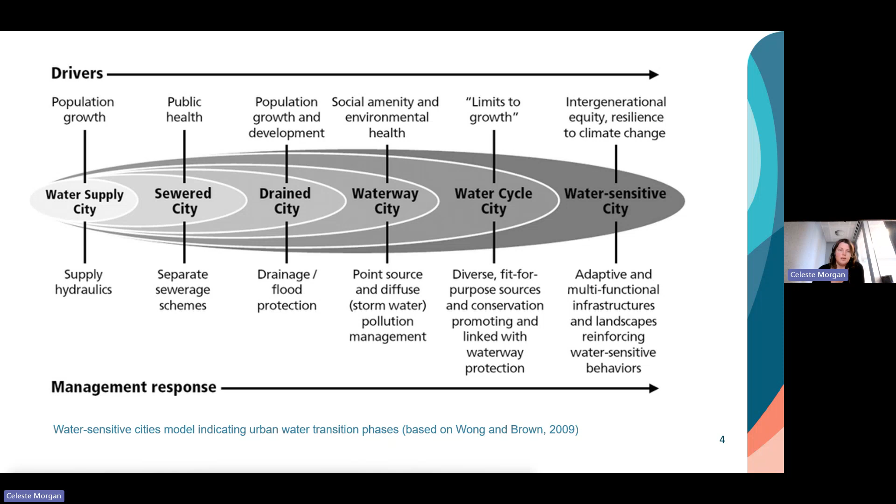Thinking about Victoria in particular, there have been key turning points in its journey over time. Waterway pollution was a key driver in the 80s and 90s, leading to best practice guidance and targets for nitrogen, phosphorus, and suspended solids pollutant removal in stormwater management. But in the 2000s, when drought struck, we started thinking about how we could capture water resources from urban areas, like recycled wastewater and stormwater, as a new water supply.

We've evolved through the 2010s to think about how we could support livability outcomes, since our cities and towns are getting hotter, so how can we support greening and cooling? At present, we're in a phase thinking about how to make this more sophisticated, how to change our governance structures and think more at a catchment-wide scale about integrated water management.

So how do we summarize integrated water management as a term? It's important to recognize it is a verb, a doing word, about a process, not a thing. So it's important to distinguish—you don't point at initiatives and say that is the IWM. IWM is the process that gets you there.

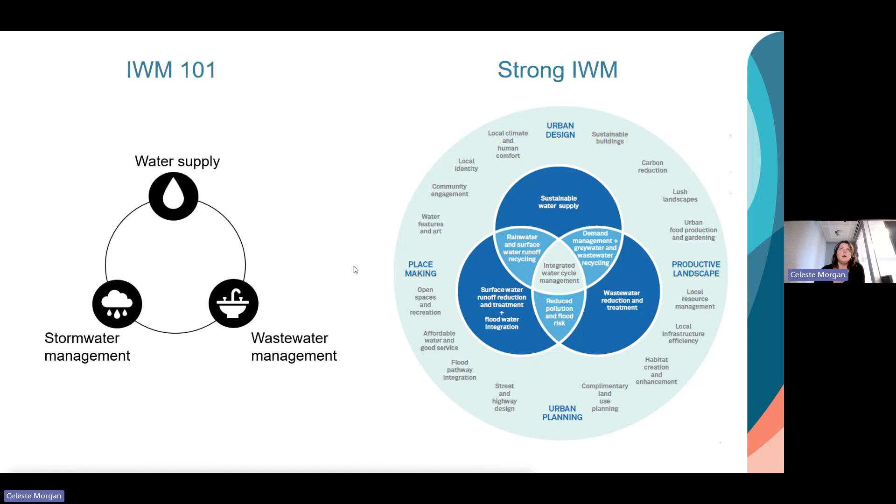So when we bring that together, what does it look like? As I said, IWM is a process, but the outcomes can be quite different in different places and really respond to the context that's needed. We could be creating opportunities for greener places, for soaking more water into the ground and keeping it in the landscape. We could be supporting healthier environments, whether that's waterways, coastlines, or bays, securing our water supplies by providing new opportunities to capture, treat, and reuse water locally, whether that's rainwater, stormwater, or wastewater, creating cooler and more resilient environments, and effectively supporting livability. There's many different initiatives in that portfolio that can come to bear.

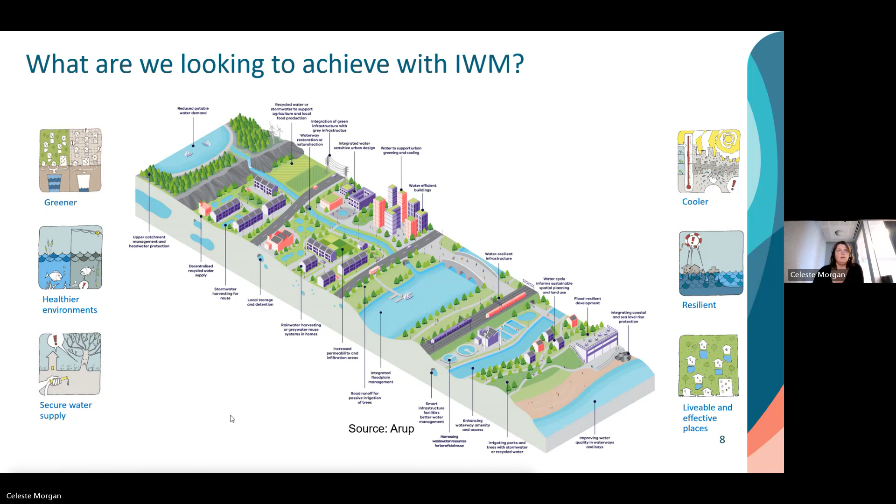So what does IWM planning look like? Many of you may have come across an IWM plan or strategy, and that can be done at different scales. It might be for a development, a council, or a growth area. Generally, these go through a fairly similar process to develop them.

It is understanding the place-based strategic drivers, bringing together that evidence base. You might hear us talk about a water balance - that's really just building the whole water cycle profile for a place and understanding how that will change over time. So as we develop more, will we have more wastewater, more stormwater? What will the demands look like, and where are they? Are they within buildings, or within open spaces? So that's why we build that picture.

And then we define those place-based outcomes and objectives for IWM, analyze the options that could make a difference, prioritize those, and then develop the plan and incorporate that into the proposal going forward and various implementation mechanisms, which I'll talk a little bit more about shortly.

That's IWM in a nutshell. Hopefully we're all on the same page as to what we're talking about today and that process of integrated water management.

But I want to reflect on how far we've got with IWM in Victoria. It's worth noting that Victoria is very much a leader on the global stage in this area and has made great strides forward over recent years. So in terms of the main things that have been happening and the key progress we've made in Victoria, I would say those are threefold.

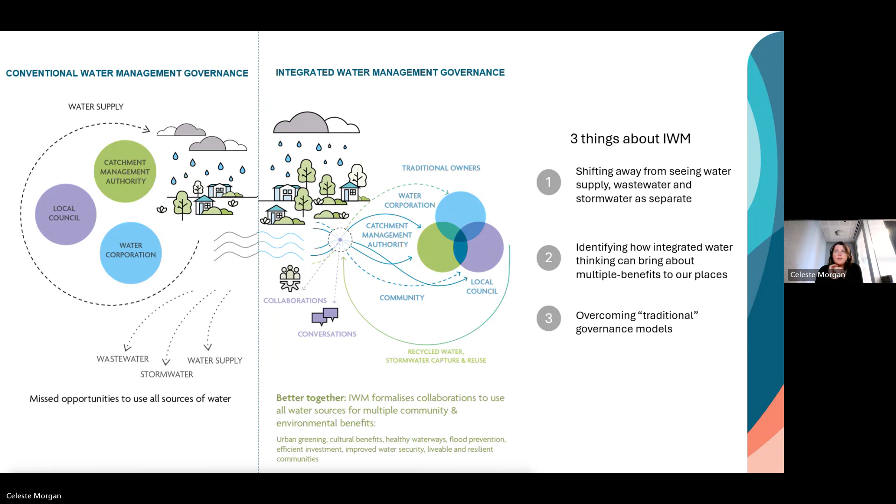So many of you would have heard of the IWM Forums, which have been set up across the Melbourne region. There's 5 forums which are based on the major 5 catchments. They're also set up within regional Victoria, usually according to the main water authority boundaries.

The focus of those IWM forums is to get that executive level commitment to IWM and to define those shared outcomes for the forum area and to provide that authorizing environment to make shared decisions. The embedded policy that supports that was developed as part of the Integrated Water Management Framework in 2017, and that enabled the forums to be created. Now the forums have been active for many years, most of them since 2018, and some of those have gone on to set targets and develop catchment scale plans, which I'll talk a little bit about, and now are in the process of really embedding those targets and setting actions for stakeholders to deliver.

The benefit, at least of having that broader view, is that it's naturally collaborative to think at a catchment scale, to think across a region and break down those organizational boundaries. So these forums are kind of set on an equal footing, so every stakeholder has a seat at the table, and we can really enable that coordination of the whole water cycle and paint a picture of those shared benefits that we want to drive. So that has been the impetus for developing strategic direction statements for each IWM forum, and now the plans and the actions that underpin those.

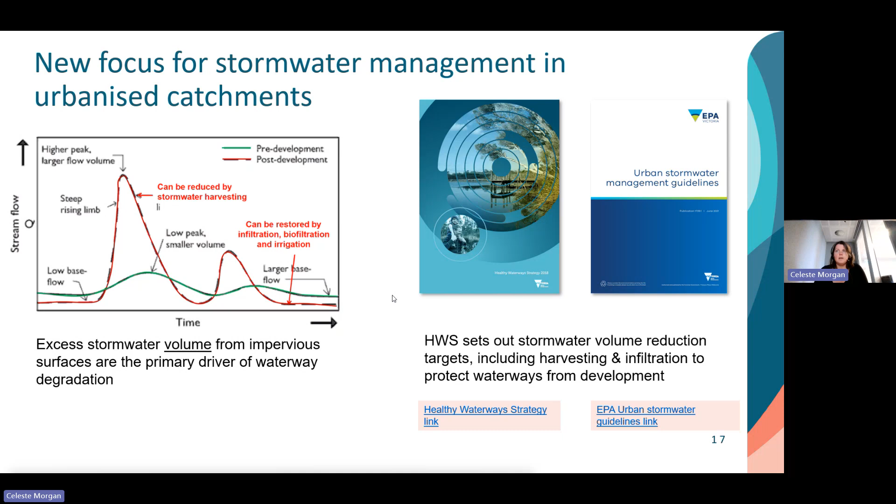Some of the details that some of you will be familiar with there is that there are targets that are available, and you'll see throughout these slides, which we can distribute. There are links to different documents which outline some of these targets, and they are divided into two areas. There are priority areas where we're asking for that removal of runoff and that harvesting to be quite advanced to really protect those priority waterways, which are defined by the Catchment Management Authority, and other areas which provide a baseline level of performance within more urbanized areas where waterways have already been impacted, but where we want to provide that ongoing improvement and help with other benefits such as flood resilience.

And how do we do this? How do we harvest stormwater and infiltrate it?

To get to the priority targets we've outlined here, where you're getting up to around 80% removal of runoff, it does take initiatives at every scale. It's important to think about opportunities to remove stormwater runoff at both the allotment and street scale, whether through rainwater harvesting or water-sensitive urban design initiatives, plus capturing runoff at a precinct scale for open space irrigation, or larger initiatives, and then also at a regional scale. Some proposals to scoop up runoff at a larger scale and reuse it are being considered across Victoria, so we can make a real impact on waterway health, but also drive water security benefits. That's a key policy progression very much front of mind in the industry at the moment.

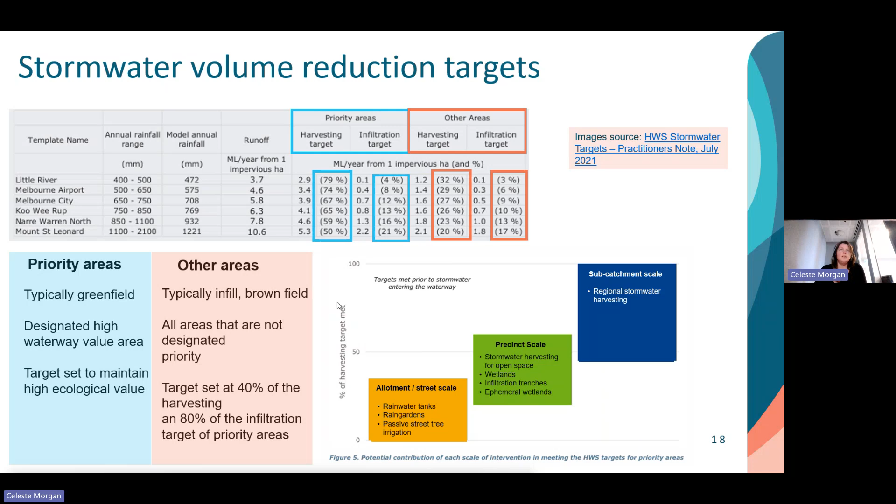How is it applied? This is a moving context, but at the moment it's applied under the Environment Protection Act, under the General Environmental Duty, which obliges all organisations to demonstrate that they have taken all reasonably practicable approaches to minimise harm. There's a bit of a grey area as to how that's enforced, but it does provide the legitimate expectation that all organisations, including developers and councils, show that they are doing everything reasonably practicable to reduce stormwater volume.

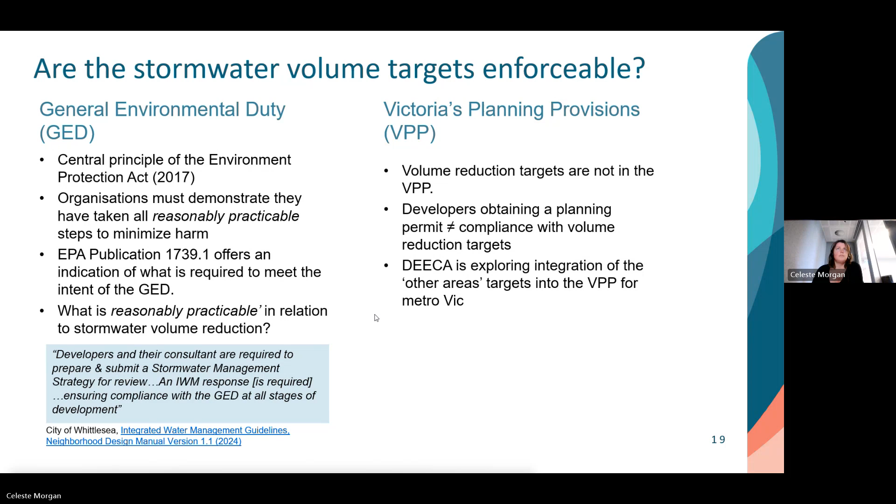The next aspect I wanted to chat through is how Victoria has been going in reimagining cities and water, and some key examples of that. How far have we got? A few stats for you: we have managed to reuse a total of 9% of our total stormwater and wastewater coming off the Melbourne region. These stats are for the Melbourne region, where we've been monitoring data so far, which has been no mean feat.

So a lot of stormwater harvesting and recycled water reuse is going on to get to that. We're supporting large amounts of active and passive open space with alternative sources. And in the Melbourne region, we have significant quantities of green-blue infrastructure in wetlands, waterway improvements, and rain gardens that have been introduced largely over the last 10 to 15 years.

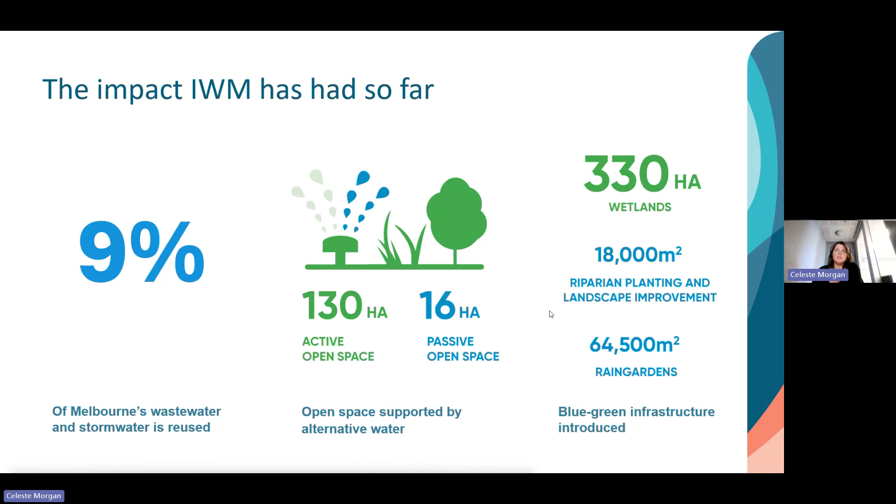I mentioned it's a place-based response, and I think it's worth thinking about opportunities for integrated water management based on: can we make impact with local decentralized water systems, or introduce a regional scheme, being the horizontal axis there? Are we constrained by urban design, or can we explore new concepts for urban design? There are different possibilities that lean into each of those. Some examples I'll chat through briefly.

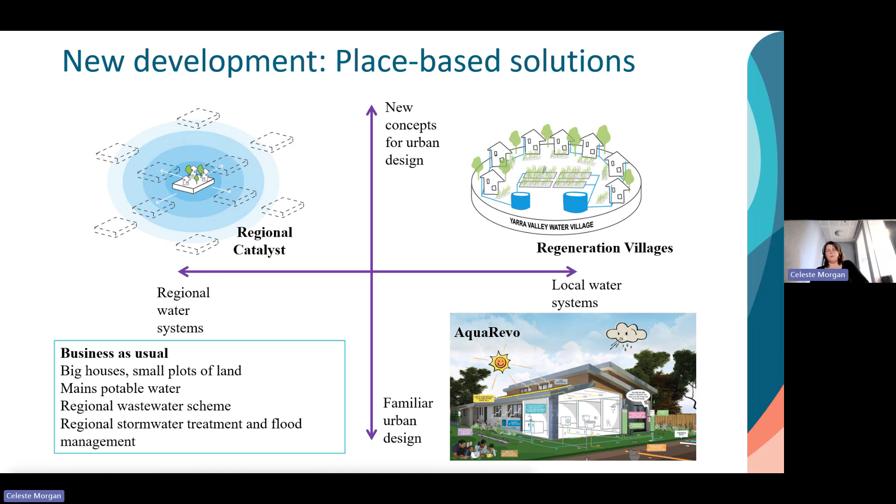AquaRevo, you may have heard of, looks like a normal development, but in terms of the tech and what's going on inside the houses and the community education, it is very advanced. They have smart tanks, which are monitored, which collect rainwater and then release it ahead of a storm coming so that they can refill. They've also trialled using rainwater for hot water supply, which is a new demand that can be accessed within the home. They also have a recycled water plant in use on site, which provides two non-potable uses: toilet flushing and garden irrigation. That's a great example which is on the ground.

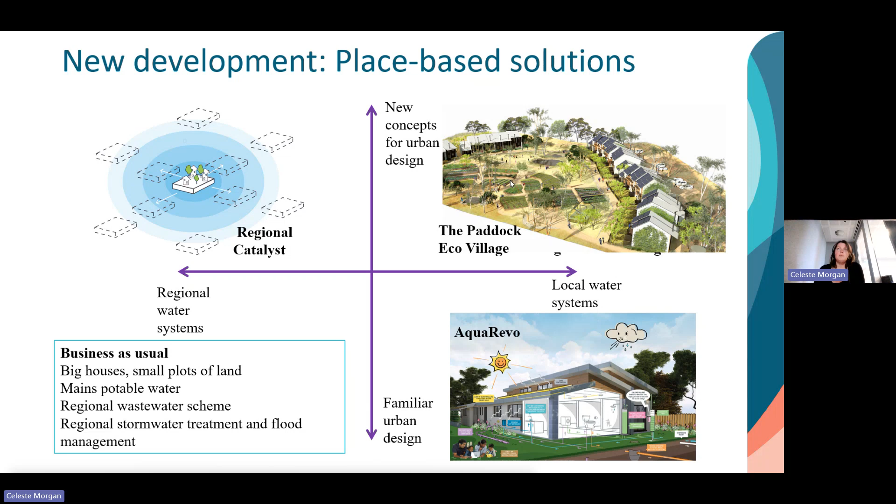In terms of new concepts for urban design, this is a development in Castlemaine called the Paddock, which has really experimented with communal growth gardens and use of water. It has communal rainwater tanks, and is really questioning how communities interact with water, but also with themselves, establishing that new way of life and new urban design principles.

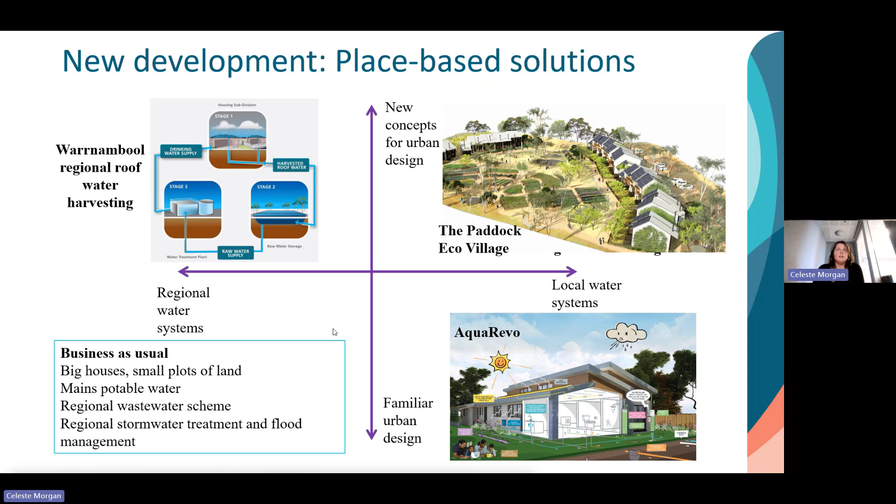For regional examples, there's a great one in Warrnambool, which we can link you to as well, which harvests from roofs and new development, takes that water, creates a new dual drainage system from rooftops, and takes that to a local reservoir to then be integrated with the city's water supply. So lots of different opportunities depending on the scale of influence and whether you're involved in the development design.

Those regional catalysts, as I mentioned, that changing stormwater harvesting drivers is providing us with more opportunities to think about what happens at the larger scale. Many developments build wetlands anyway to meet water quality targets. So can we be harvesting from those wetlands, and can we do that in a network arrangement to take them to a new source of demand nearby, whether that's a reservoir or for local reuse?

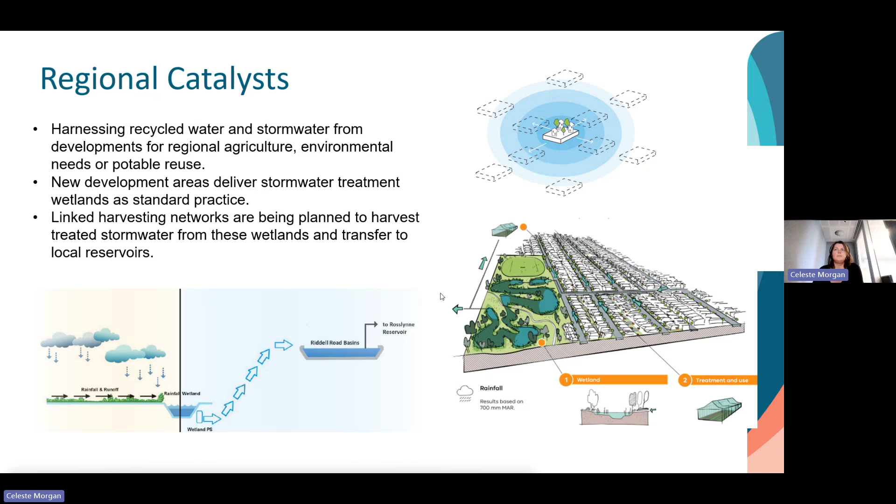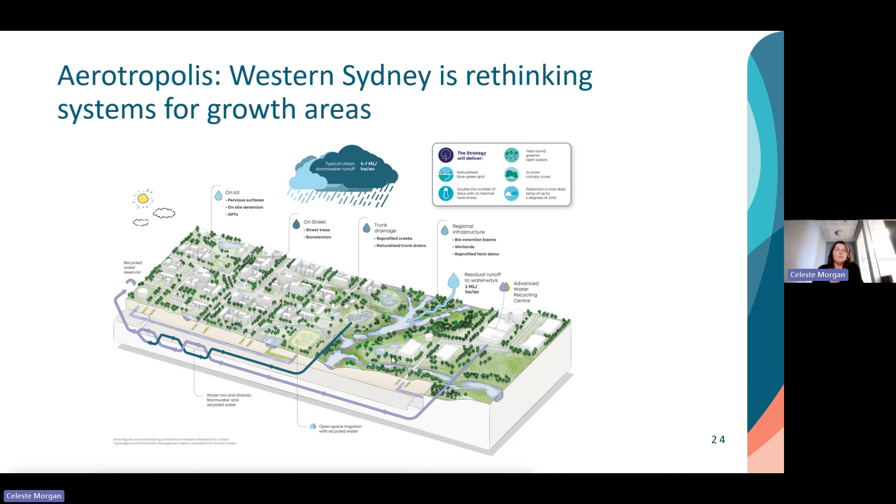We're not the only ones thinking about this. Outside of Victoria, some of you may have heard of Aerotropolis, an area of Western Sydney where they are thinking about effectively the same kind of solutions. Can we combine stormwater harvesting, blend that with local recycled water use, and supply that back to development? They're also thinking about how to embed better requirements for cooling and greening in the planning requirements so that there is an uplifted demand for irrigation to help reuse all of those water sources.

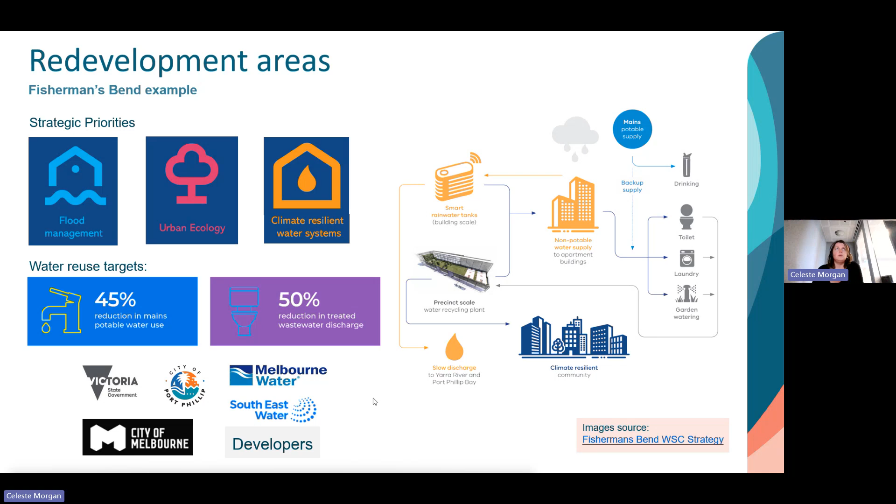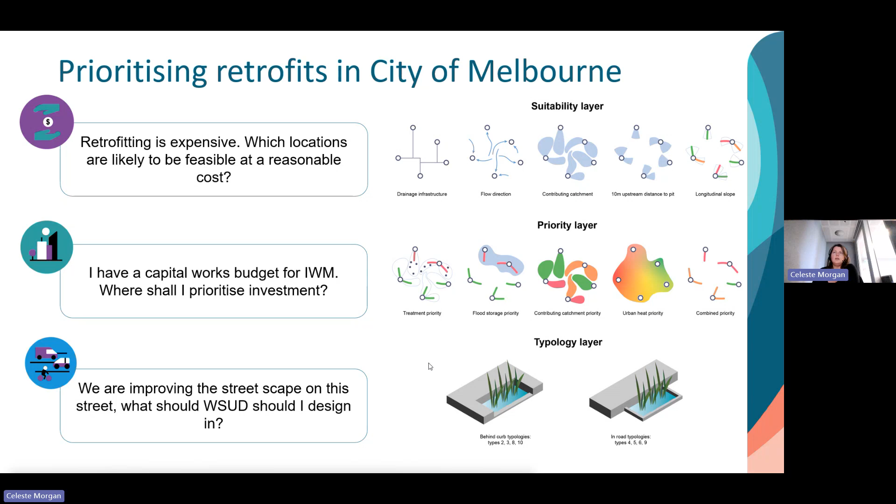I'll touch quickly on retrofits, which is another important aspect. It's not just about new development. This example is how City of Melbourne have been rethinking their city and looking at priority areas for retrofitting integrated water management initiatives within streetscapes. Here they embedded a spatial tool within council to at least do a first pass of feasibility and suitability for initiatives, and then look at prioritizing those and some suggested typologies.

What does that look like? Well, it looks like understanding how rainfall is falling on the city, how it naturally drains in streetscapes and where it effectively disappears underground into catch pits, and how we could intercept ahead of those. So that gives us an idea of where within the streetscape it makes most sense to introduce things like permeable paving, rain gardens, or passively irrigated street trees.

And to do that as well with the benefit lens in mind. So where is the most potential from a treatment perspective, from a flood storage priority? Where can we get the biggest bang for buck in terms of intercepting the most stormwater, and where are the urban heat priority areas in terms of the vulnerability of the population?

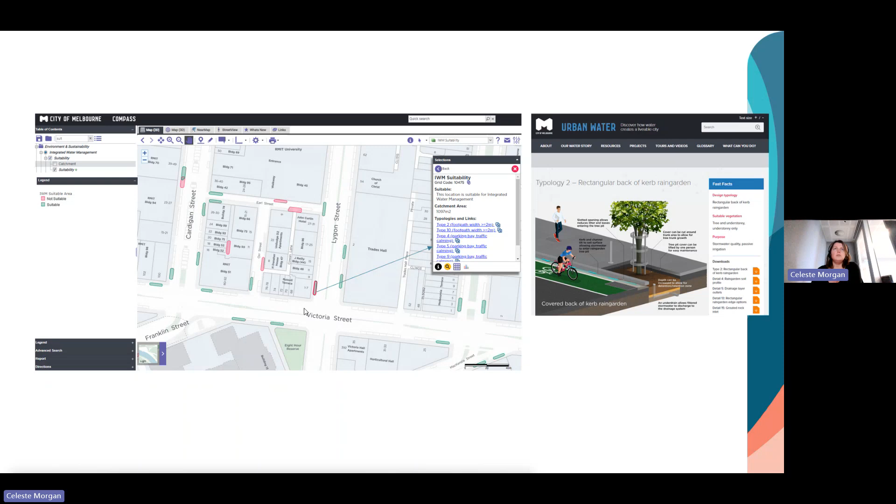That is now a kind of embedded system for council where they can see these windows of opportunity, and it links them to possible design typologies within their own system, which they can then apply. So any part of council can see that and use it as a first pass for potential solutions.

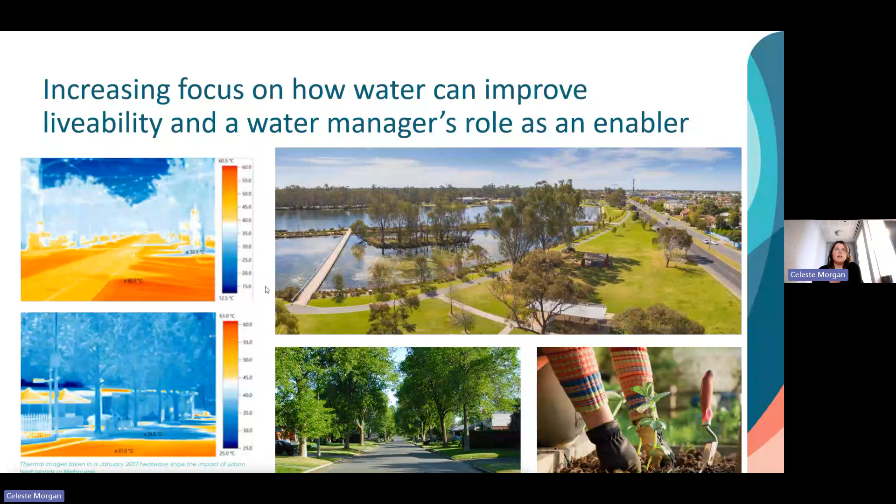The last bit I'll touch on quickly before we go to a short question break is just redefining value. That's been a key part of the journey in Victoria. Part of that is a rethinking of the role of water utilities and water corporations to not just be service providers, but to be purveyors of livability. How can we be responding to communities' needs for water by becoming an active participant in enabling IWM? Often that involves an organisation acting beyond their sphere of control, beyond their responsibilities which are written, and merging into their sphere of influence, working with other stakeholders, and the sphere of context.

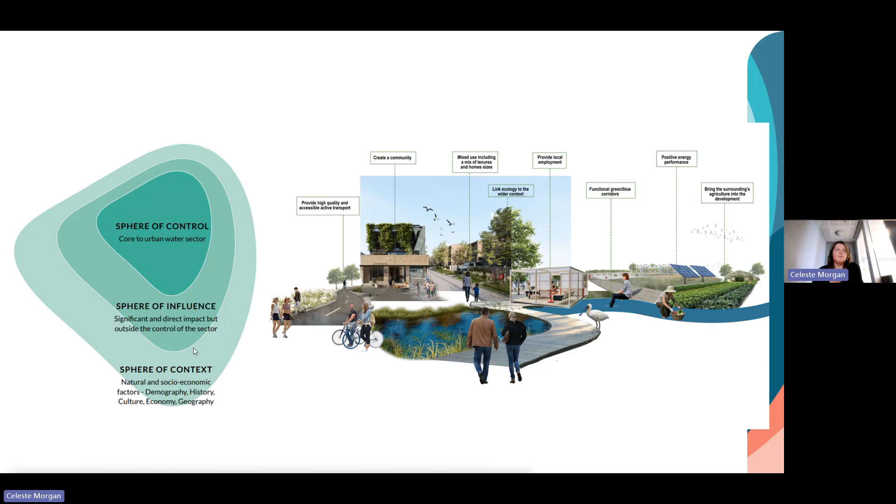To do this in the round, there's been a lot of work done on how we can value benefits better. So valuing the amenity benefits of community engagement, of greening, and bringing those into the conversation, as well as the standard benefits around the cost of water and water reuse, and then also getting an understanding of who's receiving those benefits as part of the business case, whether that be councils or stakeholders directly, or whether it's going to, say, park users or the broader community as a whole, benefiting from things like waterway health. There are a lot of resources which we've linked you to in this presentation if you're interested in that.

Another aspect which is becoming more commonplace in IWM is thinking about the forward plan. So not just doing a plan that sits on a shelf, but understanding what's called adaptive planning and how future opportunities can change depending on things like new legislation coming into play, or different funding paths, or different decisions affected by organizations, developers, etc., so that we can have a plan going forward for the foreseeable and pivot what solutions are being supported based on that.

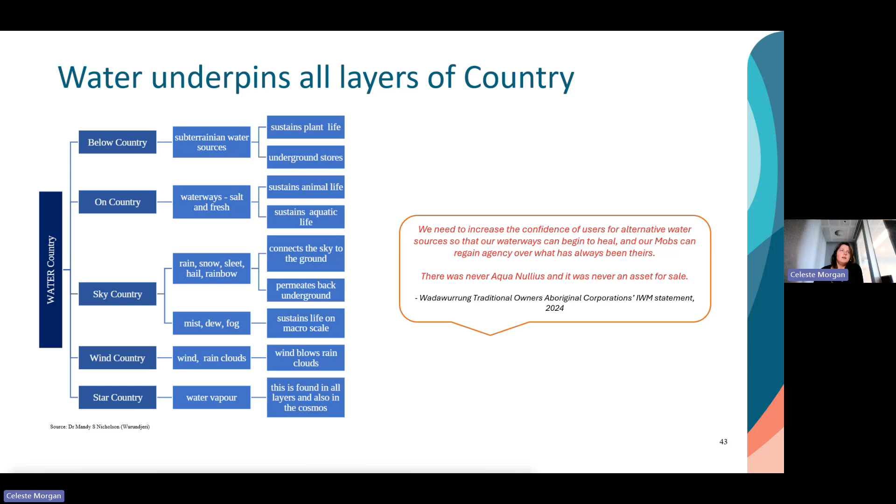There are so many layers of country, and water runs through all of those, and we shouldn't just think of them as water assets, but as that beautiful connection between mist, rain, sky, below country and on country, and all the expressions of water that we see there. The Birrarung has been recognised as a living entity, and that's something many waterways across the world are being recognised as. And I challenge you to really rethink, not just water and how we can manage it, but what if we designed our places as if we were water?

So from a raindrop's perspective, how is it treated once it falls on country? Is it greeted with, if it falls on a road, immediately doused in oil and sent down into an underground drain before it then returns to its mother as a living entity of the waterway? Or is it welcomed into the landscape, cradled and filtered and given the opportunity to bring a landscape to life? So really thinking about how we can reharness our design to think about how water moves through our cities.

In terms of funding, I'll just touch on this quickly, but I think there is a lot of movement afoot in terms of how we bring together co-funding in a smarter way. This is for the intent of things like the Swimmable Birrarung movement in Melbourne, which has a really big earth shot outcome to come about, to make the Birrarung swimmable, particularly in the central Melbourne areas, to welcome back communities to our waterways, but also to do the stormwater management that is needed and the wastewater management within the catchment to enable that.

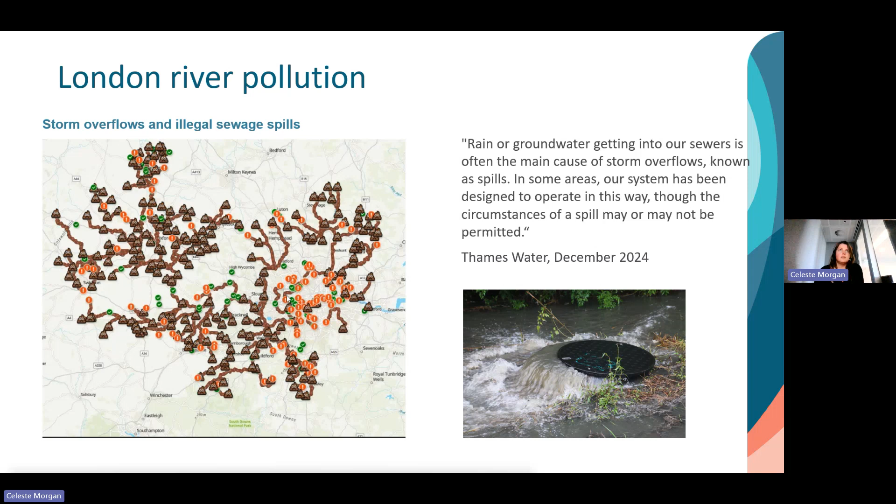A key example of this has recently been done in London, which has a similar city-scale problem with waterways pollution, in this case because they have combined sewers and storms lead to significant overflows. They've set up a market-based instrument where every time you rip up a road to replace utilities, if they put back that road with water-sensitive urban design or permeability, a fund is set up to effectively pay those utilities or whoever's doing the works, and they can receive credit for that because it's in the interest of the water authority to pay for those services and that gradual improvement over time.

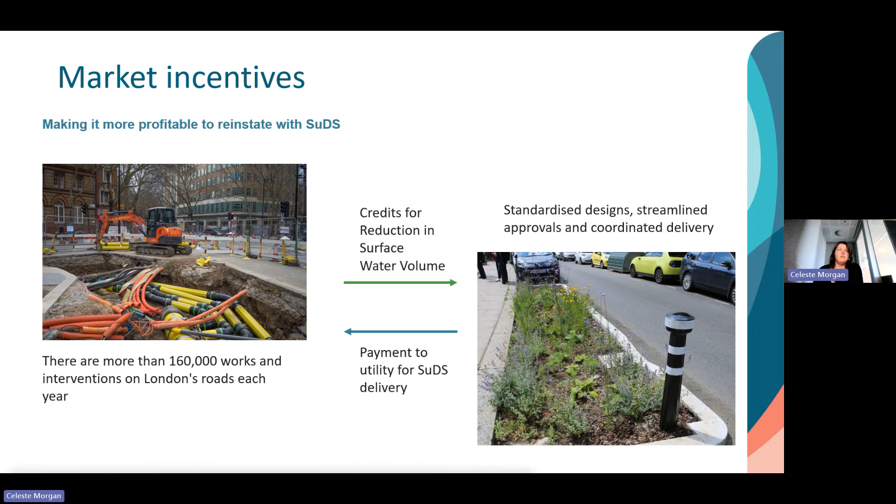So lots of new thinking about how we can incentivize those kinds of mechanisms. The third one is water circularity—how can we harness thinking around a water circular economy to drive new outcomes in IWM?

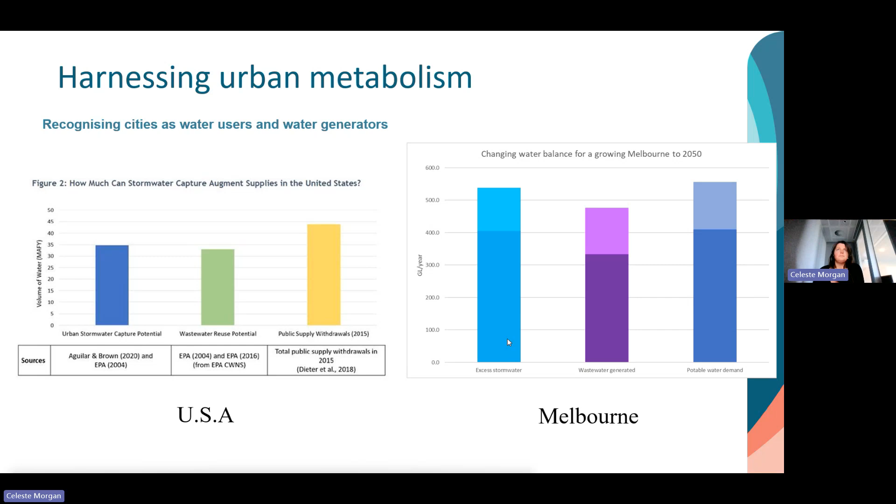This is a typical water balance for any city, comparing here the USA and Melbourne. We always have an excess of stormwater and wastewater in the water balance compared to the water a city actually needs. There's that imbalance—effectively an excess of water in a city that we're not harnessing. As our city grows, we're getting more and more of these resources arising, but we're only using a portion of it.

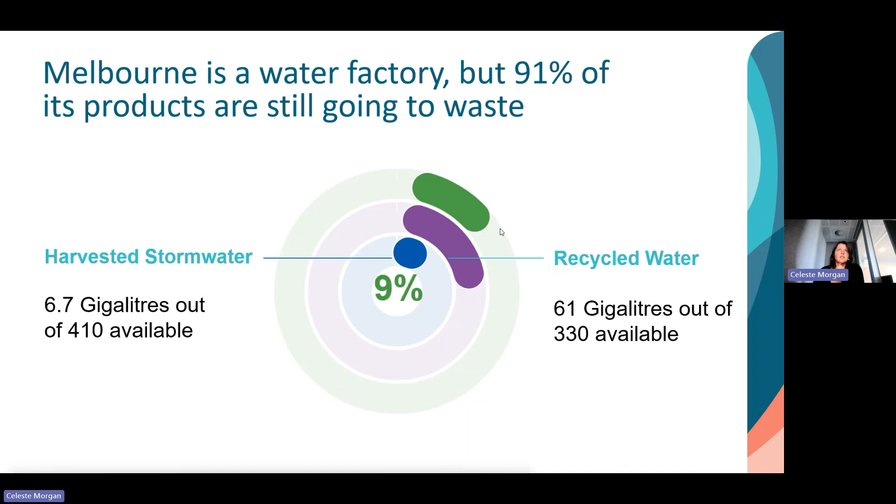In Melbourne's example, we're using 9%. That means 91% of those urban water resources are going to waste, and they're impacting our environment at the same time. So how can we flip the conversation and look for more opportunities to increase demand?

Flipping the conversation to look at how we can harness them in homes, for agriculture, particularly on the edges of cities, how we can use it for greening, how we can use it for future industries—which I'll talk about data centers shortly—or how we can scoop up those supplies and use them for city supplies, whether that's purified recycled water or regional-scale stormwater harvesting.

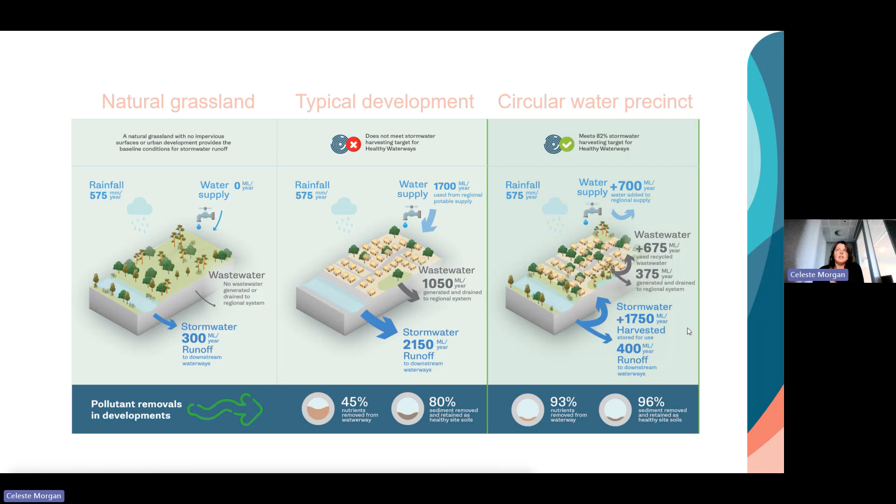This helps us reimagine our developments in a different way, and we can descale that circular economy to a development scale and really be thinking about the urban water they're producing and how that can be contained in more of a decentralized way.

The last one I wanted to talk about—you probably didn't think I'd be talking about data centers in an IWM sense—but to end on this, because it is a moving feast in terms of the drivers for IWM. Data centers are certainly in the news and something that water authorities and councils are finding coming across their desk, and they do have a water implication. It depends on design and size, but we're seeing that growing demand for data, and it will be housed in data centers, particularly in urban centers like Melbourne.

As we're seeing bigger and bigger data centers in particular, the cooling solutions they utilize increasingly depend on water—whether that's evaporative cooling or something called adiabatic cooling. So we do expect them to be large water users in many cases.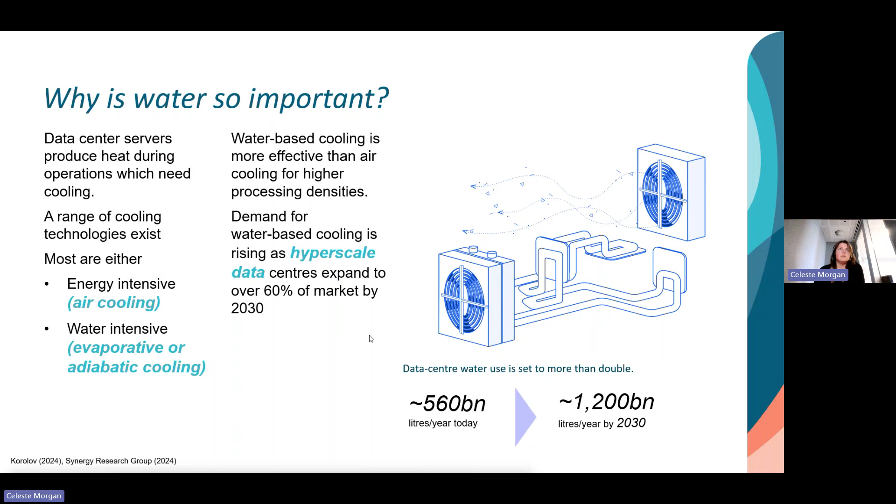With new water drivers coming in, whether it's data centers, hydrogen, or other major industrial demands, how do we make them good ancestors rather than just good neighbors? Can we use these as an IWM catalyst for new opportunities? I think the way we can do that is by having a major user—can we make sure they're using things like recycled water or stormwater?

And also think about where we're driving those to be located. Can they be a catalyst for a broader alternative water network? Can we create water-rich environments where we're taking that water source and creating other co-benefits in that area, thinking beyond the life cycle of a data center, which may only be in its current form for 5 to 10 years? Are there other uses for that area where we want to bring those water resources and harness them locally?

So a lot of interesting things on the horizon.